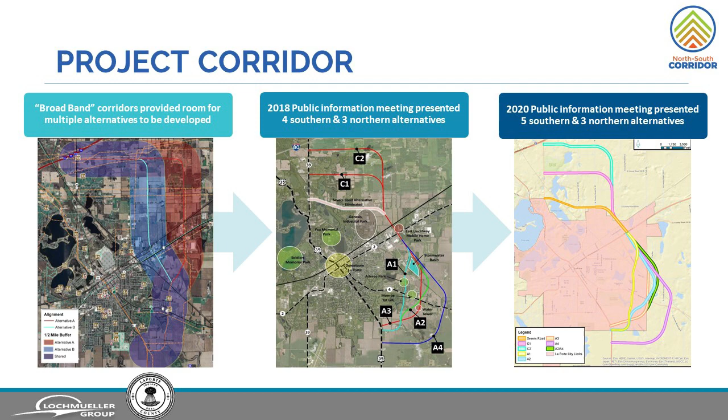Following the 2018 Public Information Meeting, the project team, in coordination with the city and the county, developed a 5th southern alternative. That alternative is a hybrid of 2 of the alternatives. These 8 alternatives were included in the alternatives screening document and will be presented and discussed during this presentation.

All 8 alternatives evaluated in the alternatives screening document depart State Road 2 in the same location, to the east of Boyd Boulevard. The 5 southern alternatives tie into US 35 on the south side of the city of LaPorte in several different locations. The 3 northern alternatives depart State Road 2 and tie into US 35 State Road 39 at 3 locations: Severs Road, County Road 300 North, and to the south of Interstate 80.

The locations of interchanges, overpasses, and underpasses, as well as roadway terminations, have not yet been decided. These elements will be identified during the next phase of the project for the recommended preferred alternatives.

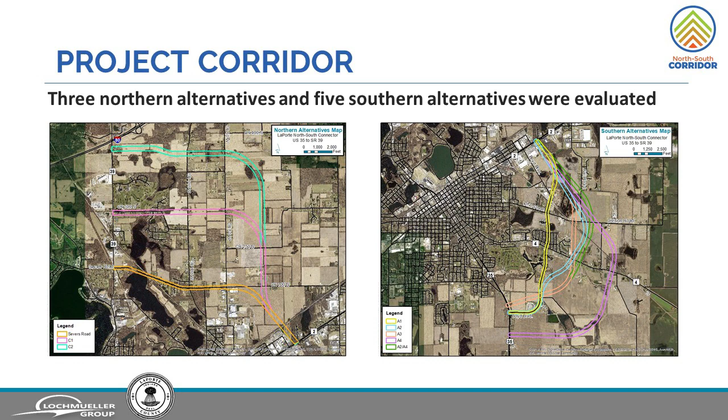Alternative A1 involves new roadway construction starting at State Road 2 and extending southwest for approximately 1 mile before connecting to Boyd Boulevard. This alternative will involve improvements to existing Boyd Boulevard until it ties into US 35. The estimated length is 3.43 miles.

Alternative A2 involves new roadway construction that starts at State Road 2 and extends southeast until near Division Road, where it turns southwest. The new construction will continue southwest until it ties into the existing Boyd Boulevard near the Stevens Road intersection. This alternative will also improve the remainder of Boyd Boulevard until its intersection with US 35. The estimated length is 3.81 miles.

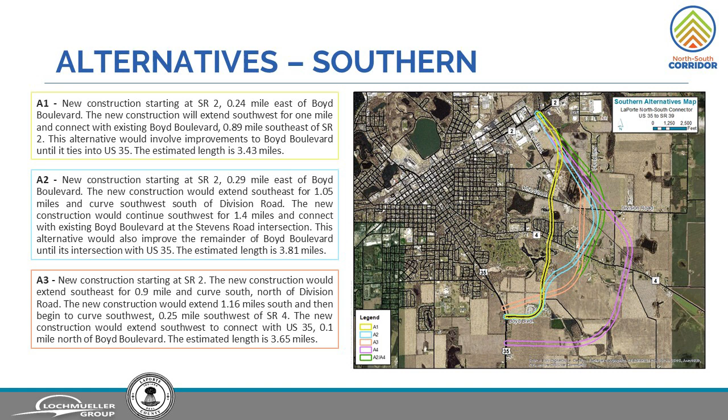Alternative A3 is an all-new roadway with construction starting at State Road 2 and extending southeast until Division Road. The new construction then turns south until south of State Road 4, where it will then turn southwest. The new construction will continue southwest until it ties into US 35 north of Boyd Boulevard. The estimated length is 3.65 miles.

Alternative A2-A4 is the hybrid alternative. It will involve new roadway construction that extends southeast from State Road 2 and then curves southwest at Division Road. The new construction will continue southwest until it connects with US 35 north of Boyd Boulevard. The estimated length of A2-A4 is 4.03 miles.

Alternative A4 will be all new construction starting at State Road 2 and extending southeast, then curving southwest, just east of County Road 150 East. The new construction continues southwest and then turns west until it connects to US 35 south of Boyd Boulevard. The estimated length of A4 is 4.99 miles.

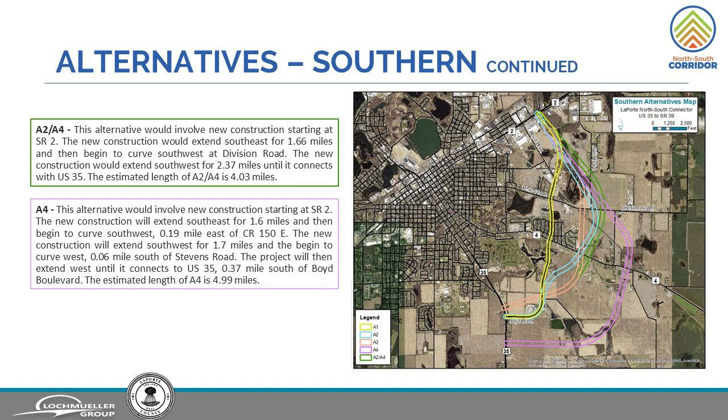The Severs Road alternative will involve upgrading and widening Severs Road and County Road 200 North from the intersection with State Road 39 to east of Genesis Drive, where the alternative curves southeast and new roadway construction begins. The new roadway will tie into State Road 2. The estimated length is 2.76 miles.

Alternative C1 involves the upgrading and widening of the existing County Road 300 North from the intersection with State Road 39 to its end, where the new roadway construction begins and continues east until near County Road 50 West, where it turns south and heads southeast until it ties into State Road 2. The estimated length is 3.68 miles.

Alternative C2 is all new roadway construction starting at State Road 39 south of Interstate 80 and continuing east to County Road 50 West, where it curves south and continues southeast to tie into State Road 2. The estimated length is approximately 4.45 miles.

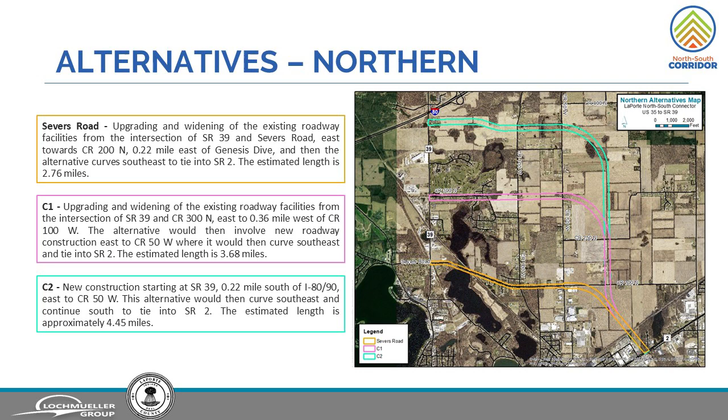In addition to looking at these 5 southern alternatives and 3 northern alternatives, the alternatives screening document also evaluated 2 additional alternatives. These 2 alternatives involve upgrading existing US 35 and State Road 39 within the same limits. The southern US 35 upgrade alternative would improve the existing US 35 from south of Boyd Boulevard north to the intersection of US 35 and State Road 2 and will match the footprint of the other 8 alternatives.

The northern US 35 and State Road 39 upgrade alternative would improve existing US 35 and State Road 39 from the intersection with State Road 2 to Interstate 80 and will match the footprint of the other alternatives. The final alternative included in the alternatives screening document is the no-build alternative, which would not involve improvements to any existing roadways or the construction of any new roadways.

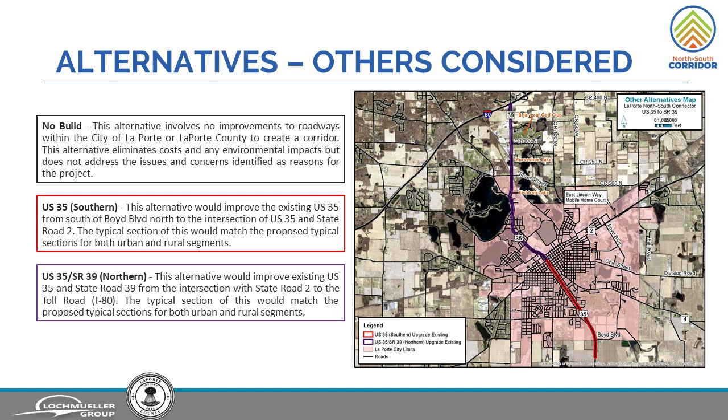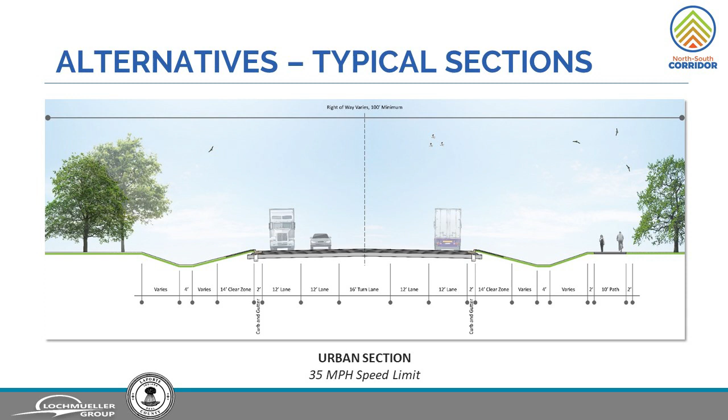All of the alternatives will consist of the combination of two typical footprints. Within the urban areas, the footprint will be approximately 100 feet wide and have two 12-foot travel lanes in each direction with a 16-foot center turn lane. A 10-foot multi-use path will be constructed on either side of the roadway. The speed limit for the urban sections will be 35 miles per hour.

The rural footprint will be approximately 160 feet wide and have two 12-foot travel lanes in each direction. Each direction of traffic will be separated by a 60-foot median. A 10-foot multi-use path will be constructed on either side of the roadway. The speed limit for the rural sections will be 55 miles per hour.

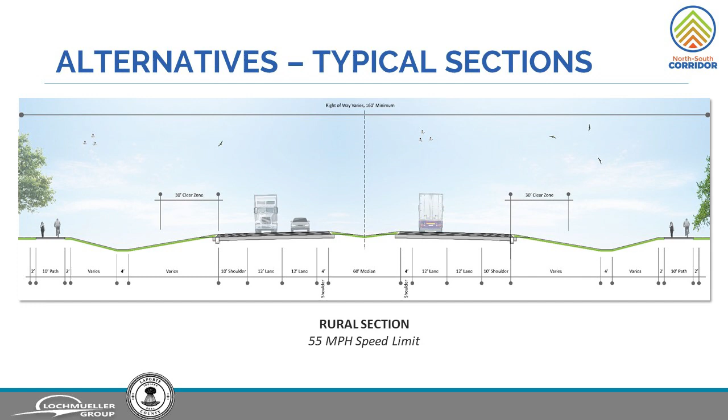The full alternative screening document is available on the project website. A hard copy can be requested using the contact information at the end of this presentation or via the project website. Next, we will review the results of the alternatives analysis for those resources that informed the decision-making process. The goal of this analysis is to provide the best balance to potential natural, social, and human impacts.

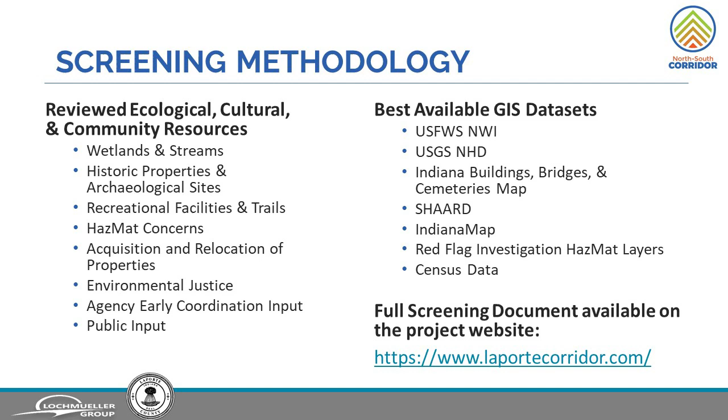Overall, the alternative that upgrades existing US 35 and alternative A2-A4 are likely to have the fewest impacts to wetland resources. For streams along the southern alternatives, the alternative that upgrades existing US 35 and alternative A1 will have the fewest impacts on streams. For the northern alternatives, the Severs Road alternative and alternative C1 are likely to have the fewest impacts to wetland resources. For stream resources, the Severs Road alternative, alternative C2, and the upgrading of existing US 35 State Road 39 would result in the fewest impacts.

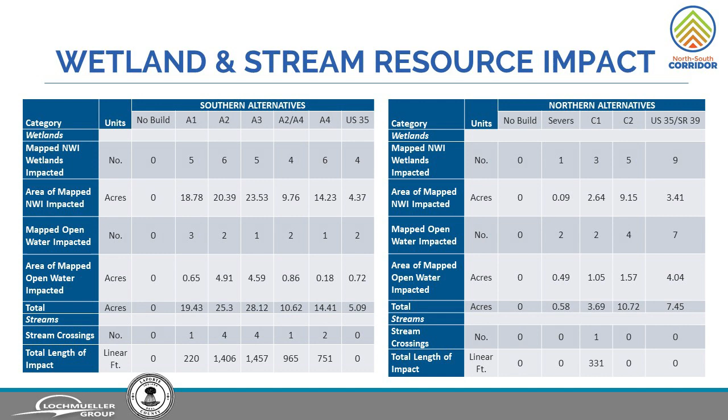For the southern alternatives, there are few cultural resources along the alternatives. The alternative with the greatest likelihood to impact cultural resources would be the alternative that upgrades existing US 35 due to the resources in historic downtown LaPorte. We see a similar pattern for the northern alternatives. The alternative that would upgrade existing US 35 and State Road 39 would likely result in the greatest impact to cultural resources.

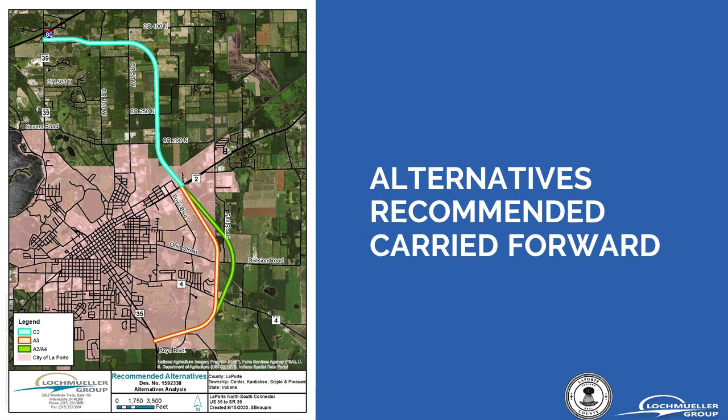Using the information identified in the alternative screening document, along with discussions with the project team, project sponsors, and project partners, it is recommended that 2 southern alternatives and 1 northern alternative be carried forward into the environmental document for further evaluation and design. Alternatives A3 and A2A4 are the southern alternatives recommended, while alternative C2 is the northern alternative that is recommended.

Now that the preferred alternatives have been identified, the project moves into the development of the environmental document. This project has been awarded federal dollars from the Federal Highway Administration through an 80-20 match program. This means that 80% of the project funding is coming from the Federal Highway Administration, while the remaining 20% contribution is a partnership between the City of LaPorte and LaPorte County. For the North-South Corridor project, the Federal Highway Administration is requiring the completion of an environmental assessment. This type of environmental document requires a formal decision from the Federal Highway Administration on the environmental consequences of the project.

The project is early in the decision-making process. While the recommended preferred alternatives have been identified, no decision on the final alignment or impacts have been made. Further input on the recommended preferred alternatives is wanted. There will be continued engagement with the public through stakeholder meetings and meetings with representatives of the public to gather additional feedback.

As part of the environmental phase, a public hearing will take place near the end of the environmental document process. This hearing will afford members of the public the opportunity to provide formal statements on the environmental document and the proposed project. The public hearing for the North-South Corridor is anticipated to occur towards the end of 2021.

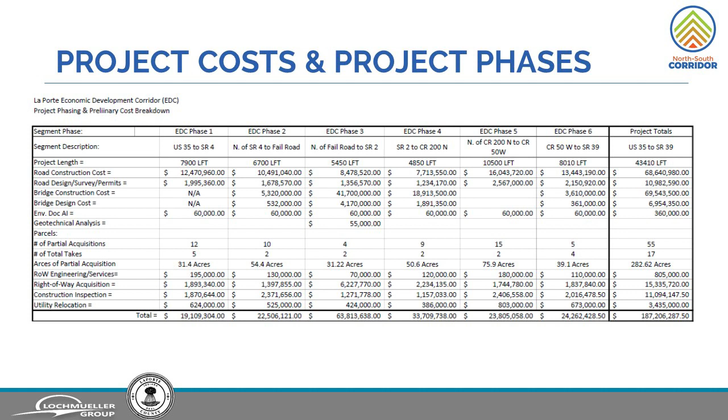Following the April 13th public information meeting, comments will be accepted for a period of about 30 days, with May 14th as the final day to submit comments. Comment forms are available at many locations, including on the project website, www.laportecorridor.com, the City Building, and the County Complex. Comments may be emailed or mailed to Ruth Hook with Lochmueller Group. In addition, comments may be left at the City Building or the County Complex. Finally, comments may be submitted on the project website using the Contact section. We welcome all feedback on the information presented, as well as on the alternatives recommended to be carried forward into the environmental document.